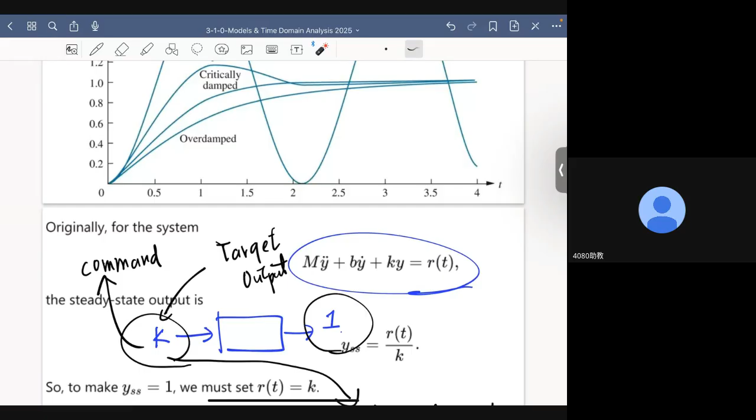Okay, I hope all of you did well for the first midterm, but it turns out that some people did not do that well. Please don't be frustrated, okay? There are second midterms and the final exams, okay?

So my intention for this lecture is that I don't want to flunk any of you, okay? That's my intention. As a matter of fact, if possible, I want half of my students in this class to have a grade of A minus or better. That is my goal. So please work hard, okay?

If you have any problem regarding my teaching material, teaching style, or whatsoever, come to see me or come to see the TA, who is a very competent young man, okay? And I'm sure he can be very, very helpful, all right?

Now, if you didn't do well for the first exam, it is quite okay, all right? Because you are probably not familiar with the style or the pattern of the exams, okay? Now, right now, you already have, I think, a very good idea of what our exams will be, okay? So hopefully you can do better. You can prepare yourself better for the coming exams.

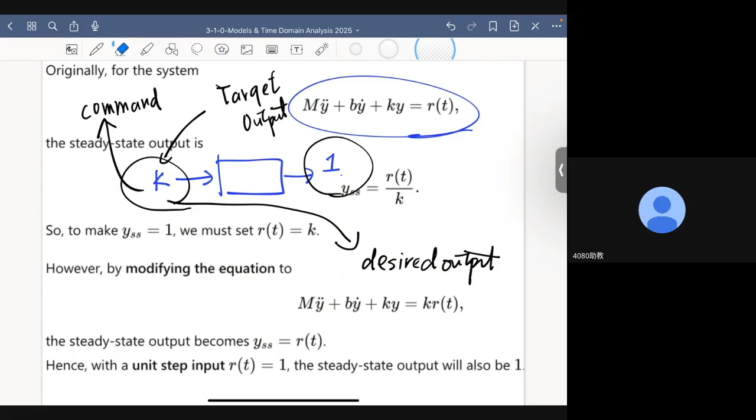And the same thing is happening in mainland China. They will build robots like they build electric cars, electric vehicles, okay? And robot building is a mechanical engineering process. It involves kinematics, it involves dynamics. It requires knowledge of mechanism. It requires knowledge of mechanical engineering design and manufacturing.

With all due respect, people from computer science and EE do not know anything about kinematics and dynamics, okay? Because they never take any course in that area. They have no knowledge about gear trains, bearings, linkage, all right? They don't know how they work, okay? But as mechanical engineers, we have been trained to be familiar with robots, okay? So the golden age of mechanical engineering is coming.

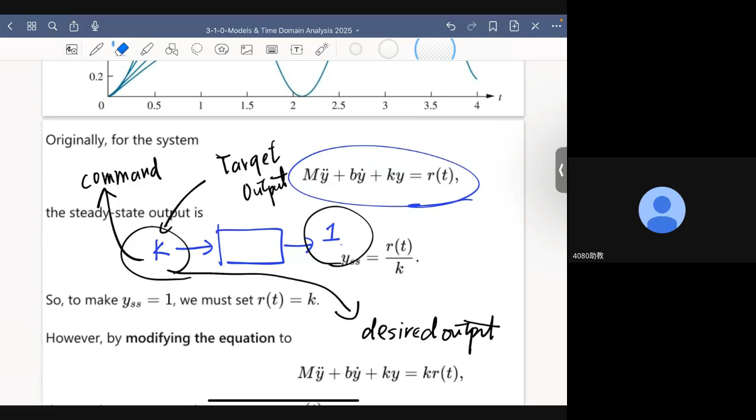And when it comes to robotics, control, of course, plays a very, very central role in building a good robot, okay? All right. Hopefully I have provided some positive messages to motivate you to spend more time on learning control and making yourself a better student of mechanical engineering, because it really has a good future.

Let me put it this way: I really envy you, because when I was young, mechanical engineering wasn't hot, okay? As you can see, for the past 2 decades, it is computer science and EE that dominate the industry, okay? And mechanical engineering probably only played a secondary role in those groundbreaking development processes. But I think things are changing, okay? Things are changing. I'm too old to see those changes become reality, but you will definitely see that, okay?

All right, let's go back to our revised spring mass damper system, whose transfer function looks like this. This is the input, this is the output, this is the transfer function. Zeta represents the damping ratio, and omega n is the natural frequency. From this transfer function, you only see 2 parameters, zeta and omega n, nothing else. Damping ratio and natural frequency, as we've said again and again, are the 2 key parameters for spring mass damper system, or for linear time invariant second order system.

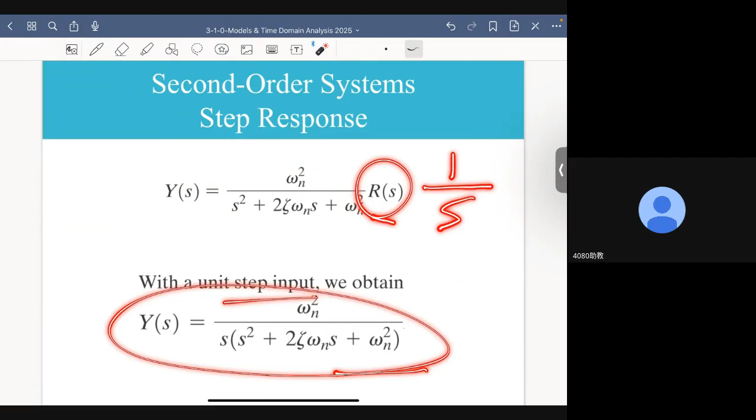Now what we want to do is study the step response. Since we have a step input, the Laplace transform of a step function is 1/s. So this is the step response in the s domain. We want to see what happens in the time domain, because we want to visualize the step patterns with our own eyes to see how the output of the system changes with time. That is something we can comprehend easily.

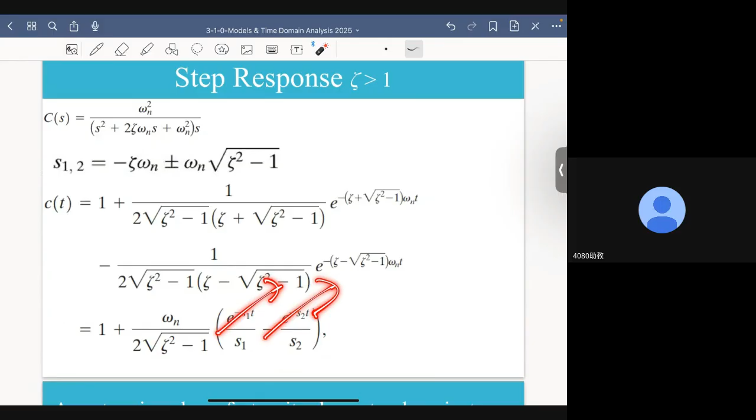So the first thing we do is assume zeta is larger than 1, which corresponds to the overdamped case. By taking the inverse Laplace transform, this is what we get for the unit step response. For this part, you see that we have a constant output here. And when time goes to infinity, as long as S1 and S2, given here, have negative real parts, these two will go to 0 as t goes to infinity. So the steady state output in this case is of course 1.

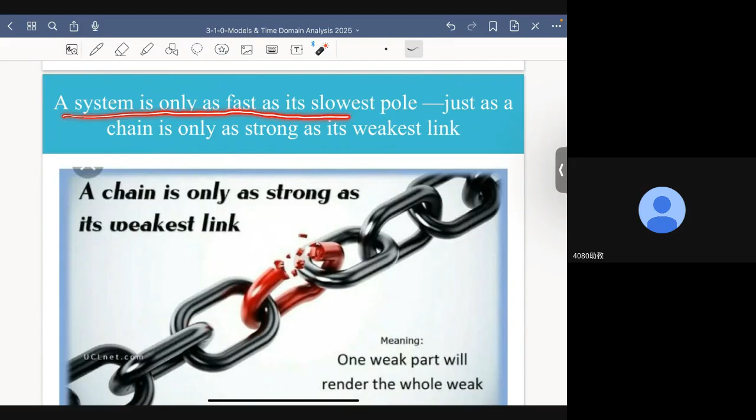Now, how do we characterize the speed of response of this system? Since we have 2 modes, a system is only as fast as its slowest pole. You have 2 distinct real poles: one is located here, the other is located here. Let's say S1 is -1, and let's say S2 is -9.

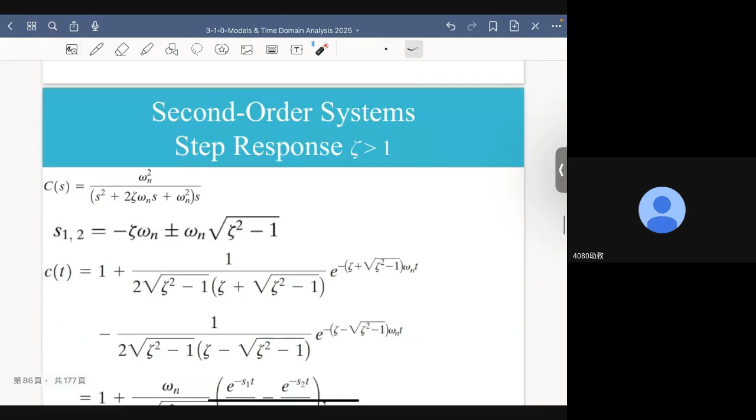So what you have is e to the minus t, and this is e to the minus 9t. This term will vanish, will decrease to 0, much faster than this one. So when it comes to speed of response, this mode is faster than that one. Put it another way, this pole is slower than this pole.

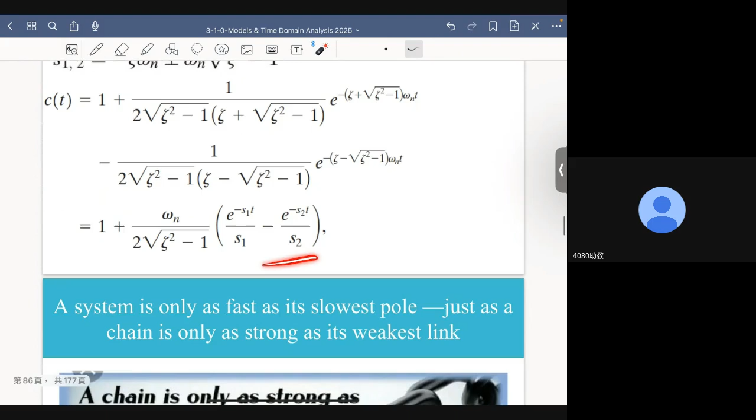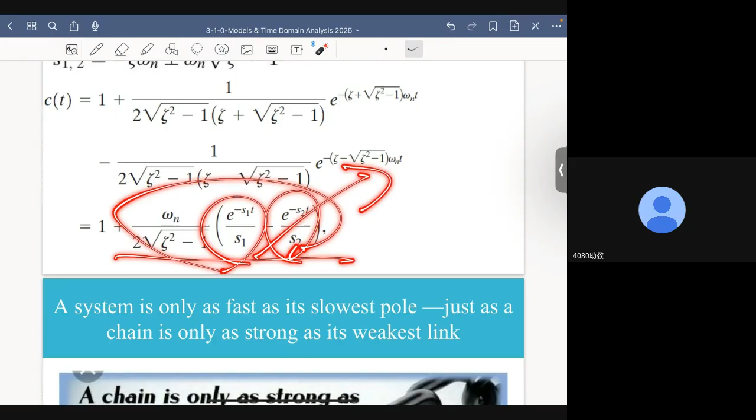A system is only as fast as its slowest pole. Because how do you characterize the speed of response of a system? It determines how fast this term vanishes completely. So if one of them disappears and the other term remains, the term collectively is still here, still not completely gone. This is the reason why we say a system is only as fast as its slowest pole, just as a chain is only as strong as its weakest link.

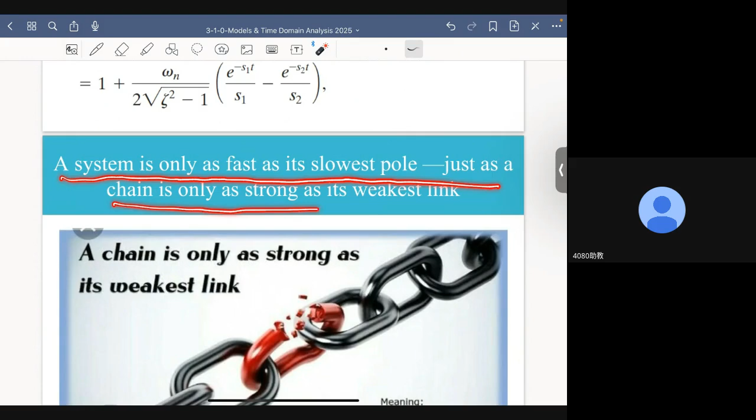It's an analogy. Now let's switch to the second case, which is the underdamped case. In this case, the value of zeta is between 0 and 1. Here, the poles are a pair of complex conjugate numbers. And remember, omega d represents the damped natural frequency.

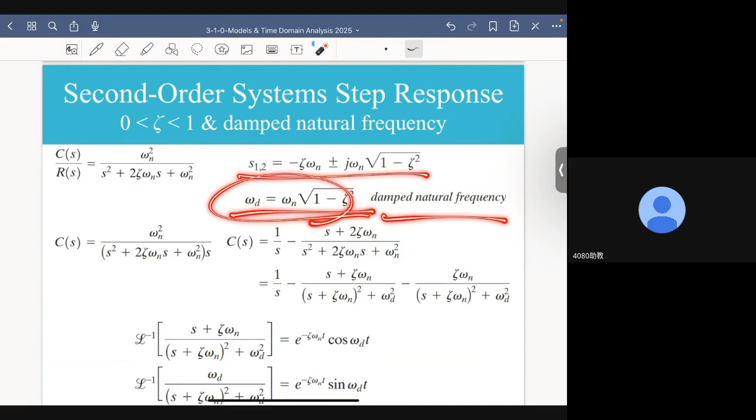Again, by taking the inverse Laplace transform and using partial fraction expansion, this is what we get. Using these 2 inverse Laplace transform formulas, this is the unit step response for an underdamped system. Again, it consists of 2 parts: the first part is 1, the second part is the transient term. The reason it is transient is because as long as zeta omega n is positive, when t goes to infinity, this term will go to 0. So this term eventually goes away. This represents the steady state output of the system, and this represents the transient portion of the unit step response.

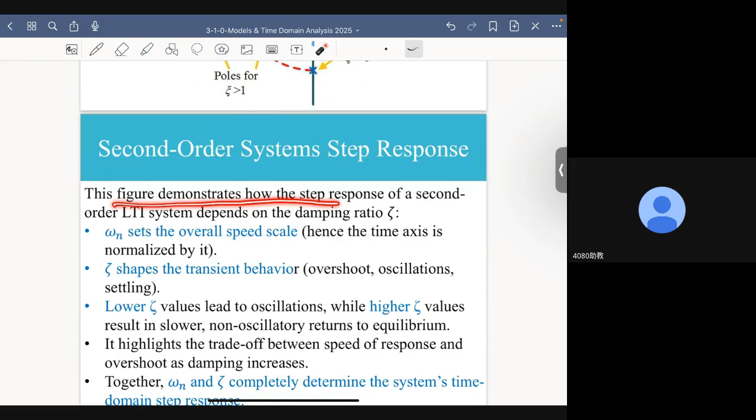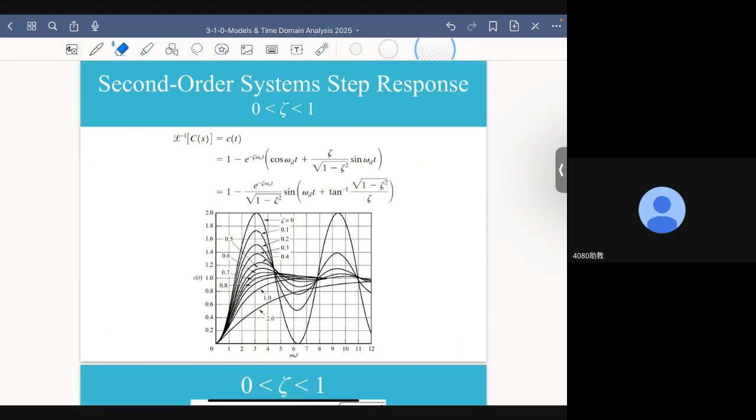Let's move one step back. You can say, wait a minute, you just told me there are two key parameters for the second order system, one is damping ratio, the other is natural frequency. This family of curves correspond to systems with different damping ratios. Well, is the natural frequency...

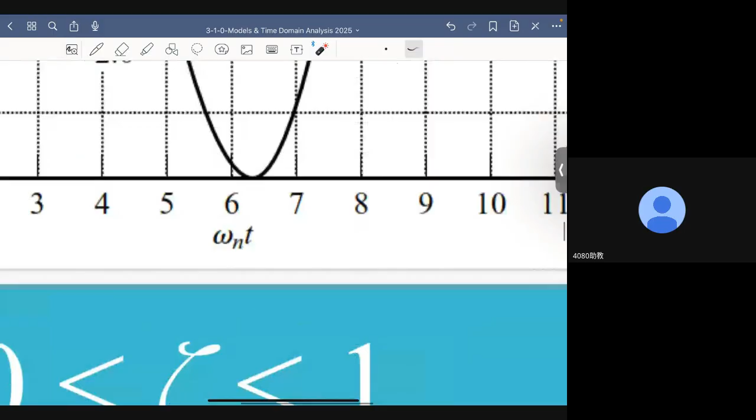What is the role of natural frequency? The role of natural frequency appears on the horizontal axis. Please pay special attention: these curves do not vary directly with time. They vary with a normalized time, which is the product of time and the natural frequency of the system. So this is a normalized time.

By introducing this normalized time, we can compare systems of different damping ratios on the same universal basis. We will go back on this normalized time and discuss it later.

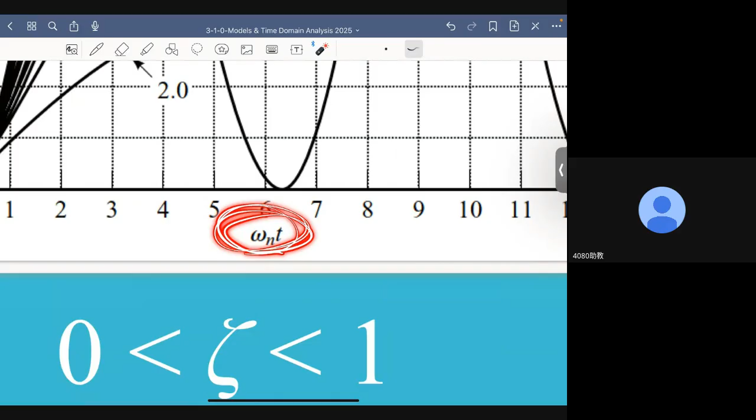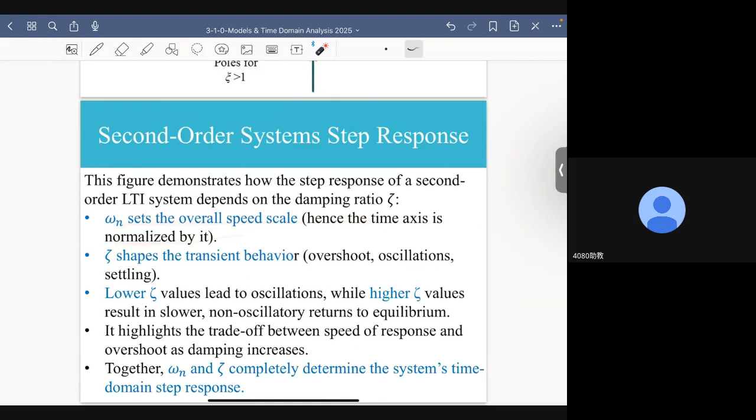That I can assure. Now let's relate natural frequency and damping ratio to the unit step response of the second order system. Omega n sets the overall speed scale, because the time variable here is omega n times t. Now please just accept this statement for the time being.

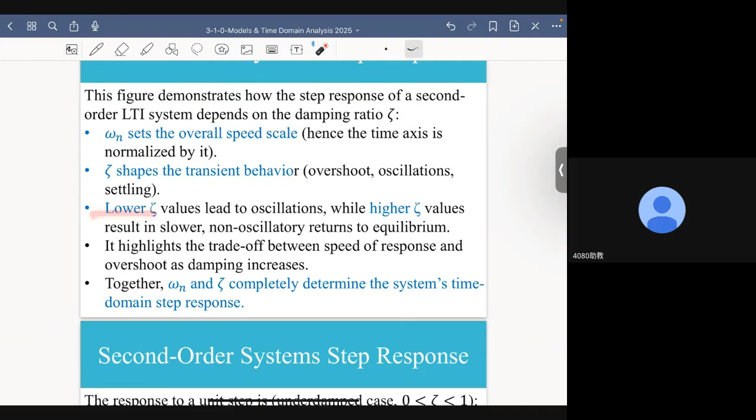I will go deeper about this statement in the later part of this course. Zeta shapes the transient behavior, including... different zeta, different transient behavior, including overshoot, the amount of overshoot, the pattern of the oscillation, and how long it takes for the system to settle. And lower zeta value leads to oscillation.

So the smaller the zeta, the stronger the oscillation, while higher zeta values result in slow, non-oscillatory returns to equilibrium. It highlights the trade-off between speed of response and overshoot as damping increases. When damping increases, the speed of response decreases and the overshoot also decreases.

We want smaller overshoot, but slower speed of response is not something we prefer, because when we do things, we want to get it done as quickly as possible, right?

When you order something online, what do you expect? Do you expect them to send you the product one week from now? Of course not. You expect them to deliver in 24 hours, in 12 hours, even better in 3 hours, or even better in 1 hour. And that could happen in the future.

So this is the reason why I tell my students again and again, there is so much to anticipate, so much to look forward to in the later part of your life. There are so many good things, so much great technology emerging, and your life will become much more productive, much more convenient, even breathtaking. So there is so much to improve as you age.

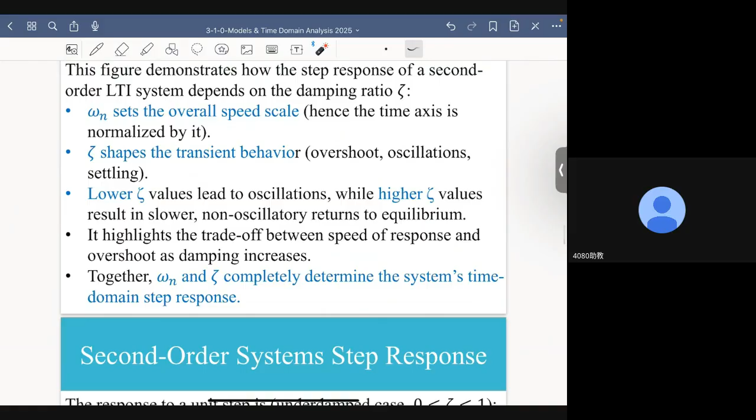Now together, omega n and zeta completely determine the system's time domain step response. Now let's look into the detail of the unit step response of the underdamped second order system.

Now we have this result. This is the unit step response for the underdamped case.

Now let me introduce a new time variable, which is dimensionless, and we denote it as tau, and we define it as the product of natural frequency and time. So tau is simply omega n times t.

Now once I introduce this term, I can rewrite this representation as this new equation. They are essentially the same. The only thing I do to go from here to here is whenever I see omega n t, I replace it by tau.

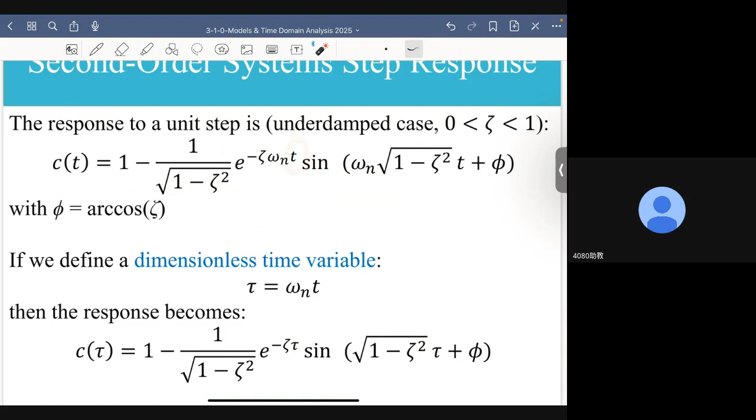So I have one omega n t here, and another omega n t here. In this expression, whenever you see t, there is always an omega n ahead of it. So once I've done that, t disappears entirely from this representation.

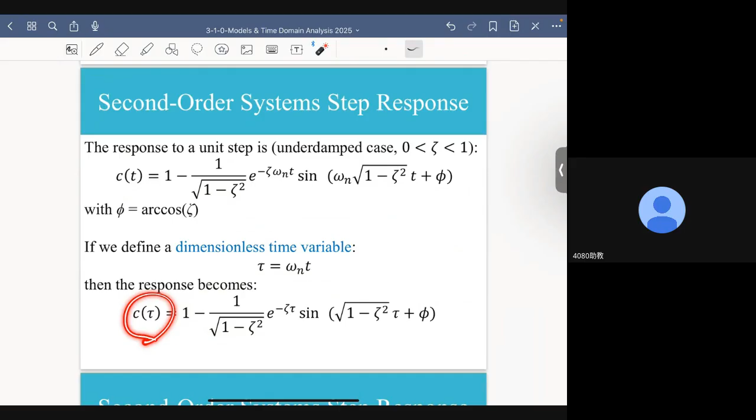And C, which is the output of the second order system, now becomes a function of tau. And then we can use different values of zeta to generate this family of curves with an independent variable of tau. That is the very reason why we call tau a normalized time.

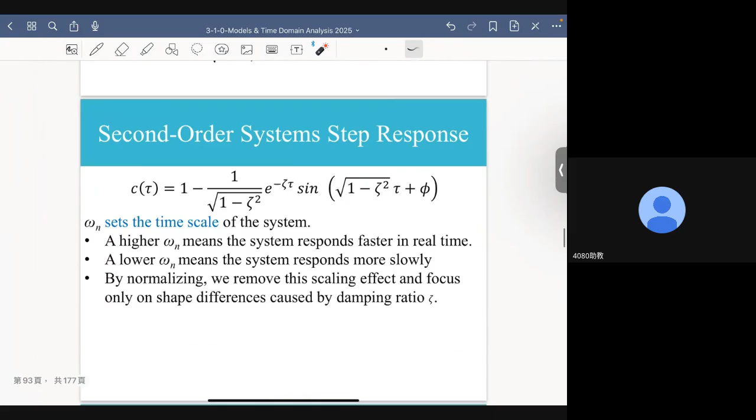Remember that we said omega n sets the time scale of the system. What do I mean by that? Omega n t, which is defined as tau, is what we said is a normalized time variable.

Why do we want to do that? Why do we want to introduce tau? By normalizing time, the response curves of different systems with different or varying natural frequency or damping ratios can be compared on a universal basis, on the same basis.

This is useful because systems with different natural frequencies will respond at different speeds. But normalizing allows us to focus on the shape of the response and the effect of the damping ratio zeta, rather than the absolute time. These statements are absolutely correct, but somewhat extra.

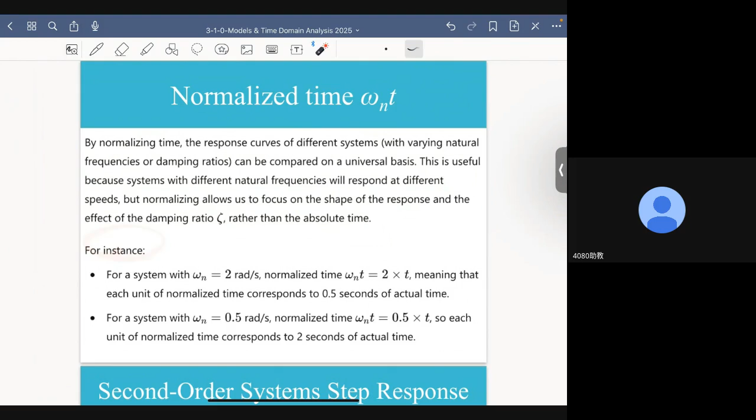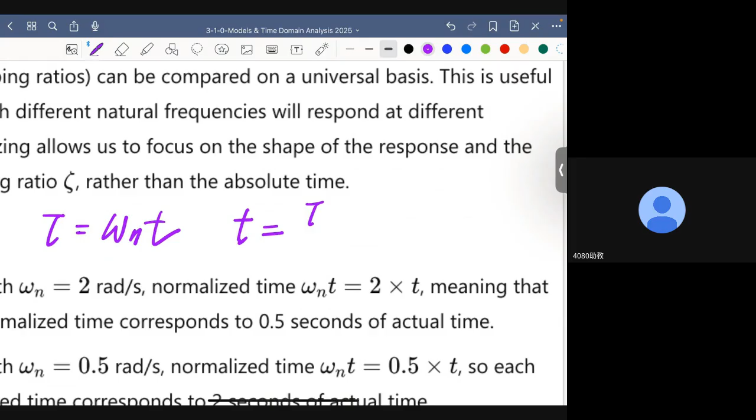Let's look at two simple examples. Remember that tau is omega n times t, so t is essentially tau over omega n. From this representation, let's assume tau stays the same, a constant. But if omega n increases, t decreases. They have an inverse relationship, as you can see from this equality.

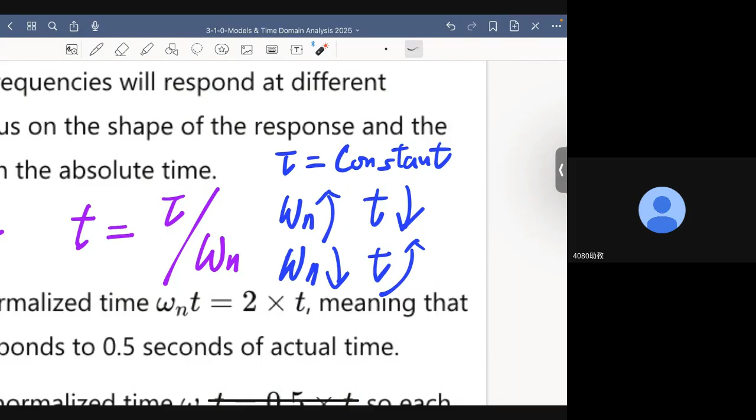In contrast, when omega n decreases, t increases. What do I mean by that? When omega n increases, which means I have larger natural frequency, t decreases, which means to reach the same destination, the time required is smaller, meaning you can get the job done in less time, meaning you have a faster system.

For a system with omega n equal to 2, normalized time omega n t means 2 times t. So each unit normalized time corresponds to, in this case, t equal to 0.5.

Now let's assume omega n is no longer 2, but 0.5. In this case, if omega n t is equal to 1, then t becomes 2. Remember that omega n t in both cases is 1, tau is 1 in both cases. But with different natural frequency, their speed of response can be revealed by the value of the real time, t.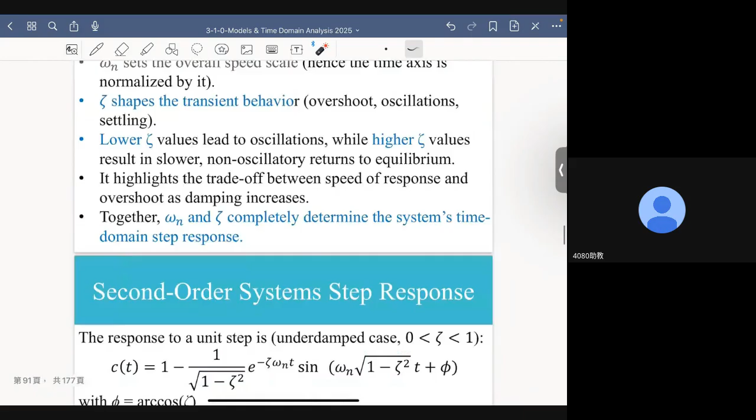So this is the very reason why these slides tell us that omega n sets the overall speed scale, meaning when omega n is larger, the speed is faster. End of story, period. A larger omega n always represents a fast response.

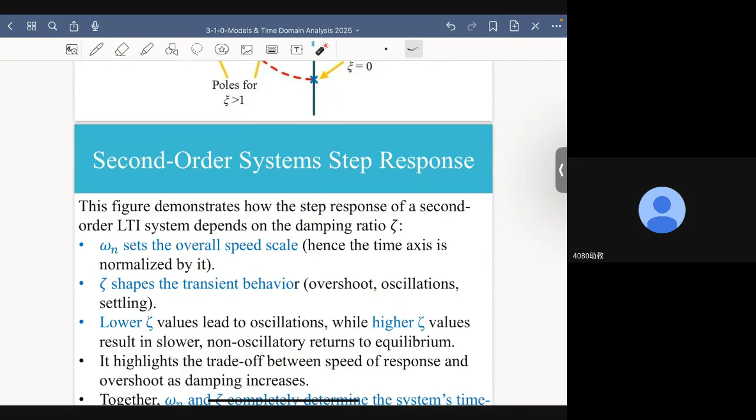Why is that the case? Remember that omega n is defined as this. How do you make a spring mass damper system move faster? First, you have large K, a very, very strong spring constant.

So once you put the mass, it will produce a very large force to counteract the applied force, and as a result the mass will move very fast. And how to make the mass move even faster? Easy—for the same amount of force, how do you generate larger acceleration? By reducing mass. So small mass, high spring constant is the formula for higher natural frequency.

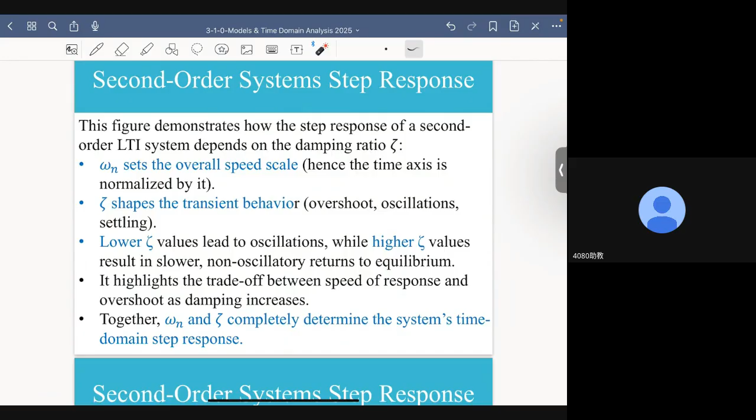And higher natural frequency, when you go back to the roots, to the very nature of the spring constant and mass, you understand why natural frequency relates directly to the speed of response of the system. Simple physics, direct relationship, very straightforward. Nothing fancy, nothing complex.

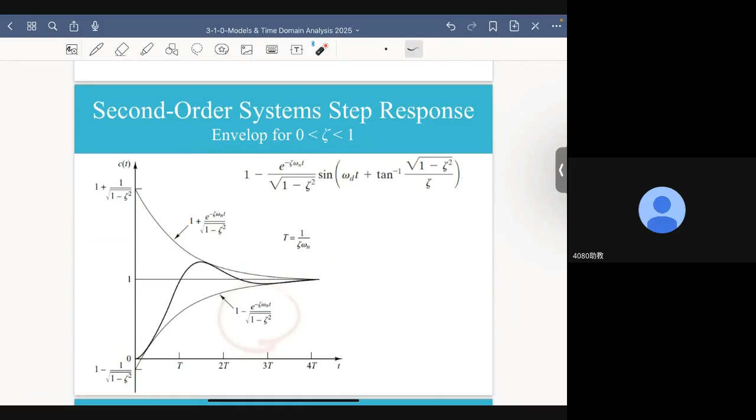This is another plot for the step response of a spring mass damper system. This apparently is an underdamped case, and we have an envelope here, which of course comes from here. Now let's check out some real examples.

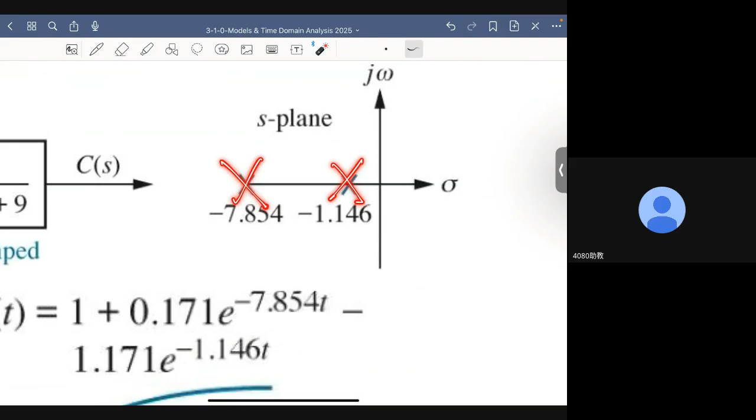Let's say we have a second order system. If you solve for the roots of this characteristic equation, you'll see two roots, which correspond to two poles of this second order system. One is located at -1.146, and the other is located here. This will be the unit step response of this system, and this curve is actually what the unit step response looks like. Nothing fancy, nothing unexpected—two real roots, overdamped system, no oscillation.

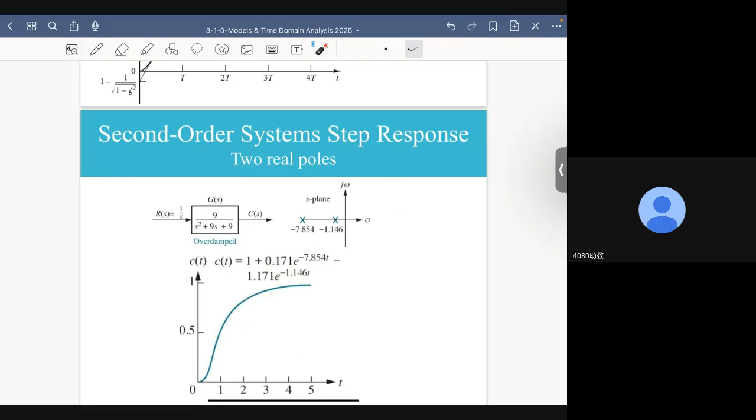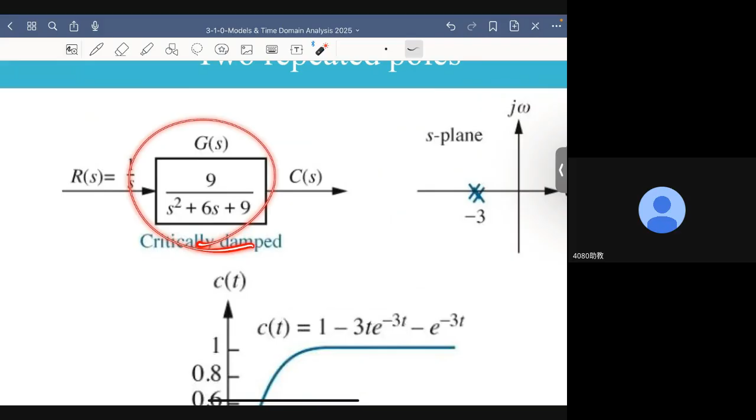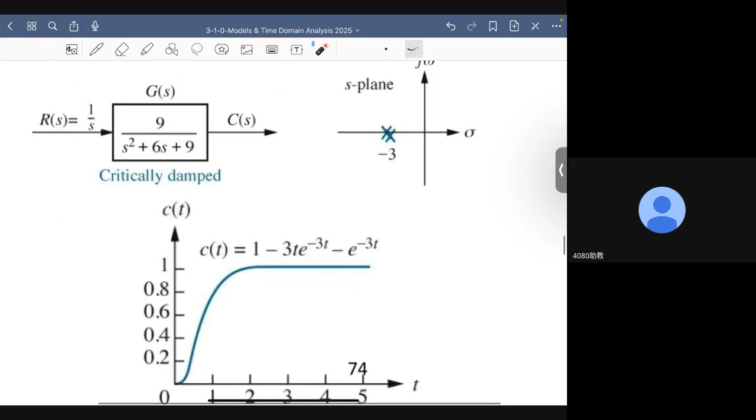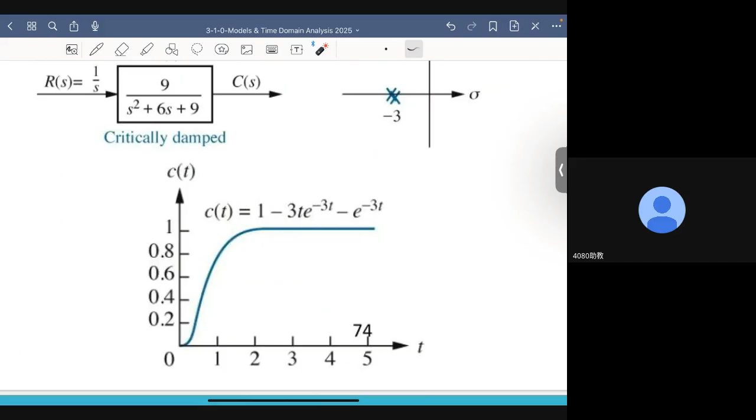Now let's look at another example. Here I have two repeated root poles from this transfer function, both located at -3. So the unit step response looks like this. The first pole generates this mode; the second pole, which has the same location as the first, produces this mode. When you put them together, this is the unit step response of the system. Again, no surprise, because this is a critically damped system with no oscillation—everything comes out as expected.

Now let's check it out—check out the two complex conjugate poles.

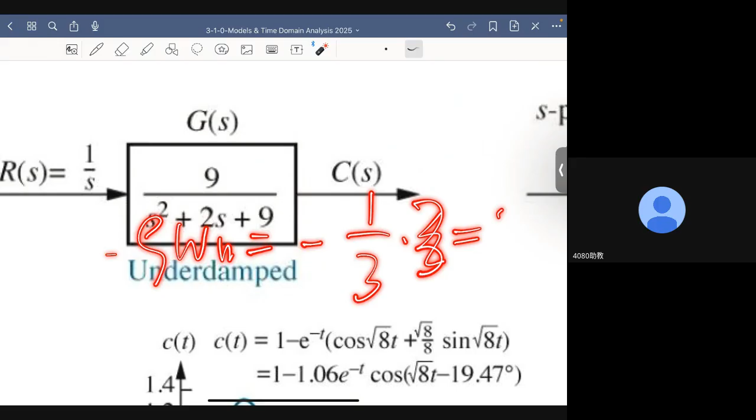And since omega n is 3, eta is 1/3, right? And minus eta omega n is 1. I'm sorry, minus eta omega n is minus 1 over 3 times 3, which is 1. This is the reason why we have e to minus t here, because the envelope should be this, right?

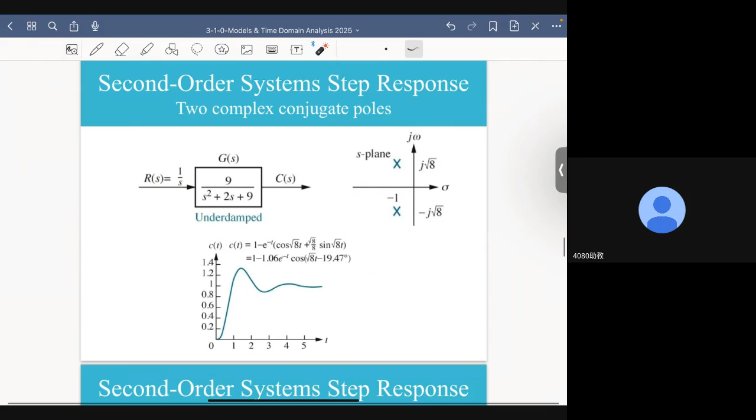Now, where does root 8 come from? Easy. This is the damped natural frequency, omega d, which is omega n times square root of 1 minus eta squared, all right? Anyway, the location of these two poles are plotted in this figure. This is the mathematical expression of its unit step response. And this is what it looked like when you plot it out. No big deal, everything comes out as expected, underdamped oscillations, okay.

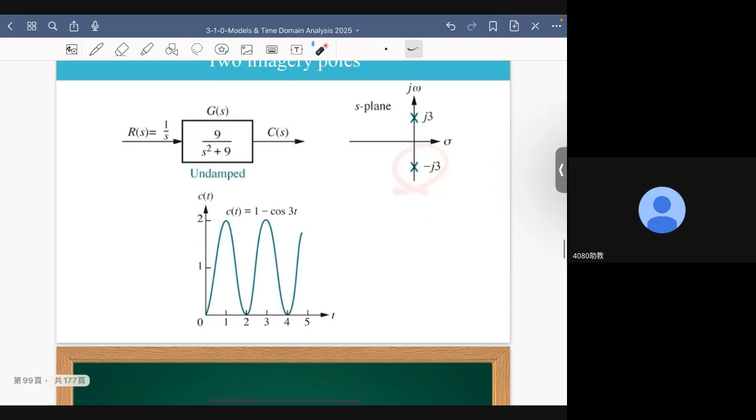Now let's go one step further. Let's see two imaginary poles, okay? Because this is our transfer function, so the poles are located at J3 and minus J3, okay? And this is its unit step response.

Because the poles are located on the imaginary axis, the system is marginally stable, which means its response will not diverge, and it will also not converge. It will just keep going, okay? The amplitude remains the same even when time goes to infinity, all right?

Now let's move to another important issue: measures from unit step response. Why do we want to study unit step response? Remember, we are engineers. When we study things, whenever we study things, we study them because they have some practical value, okay?

Now, the reason why we want to study step response is by examining the resulting step response, we can come out with many measures which can help us characterize the performance of the second order system—how fast the system is, how stable the system is, okay? We must have some measures to quantify them, okay?

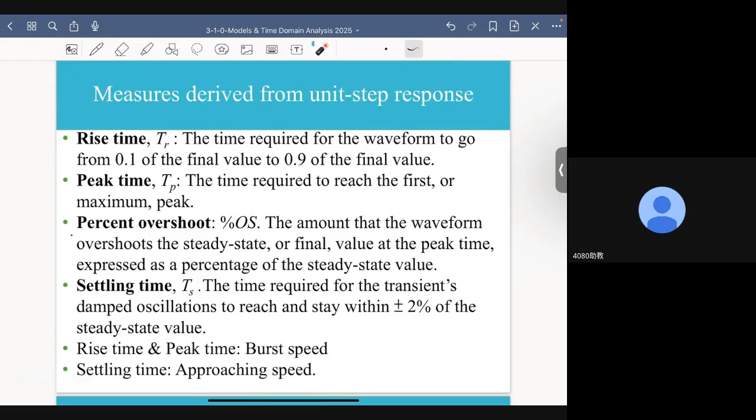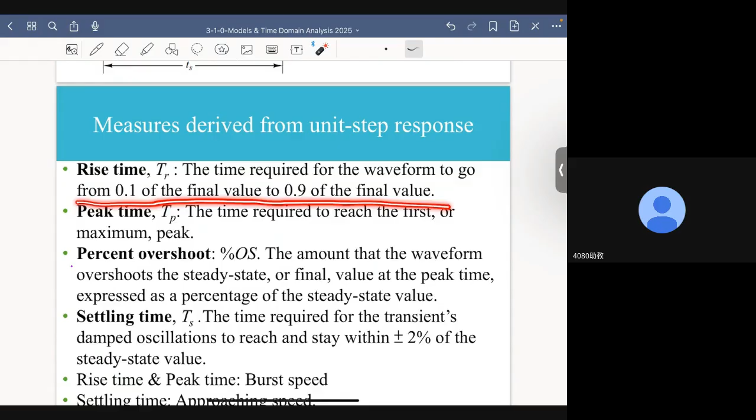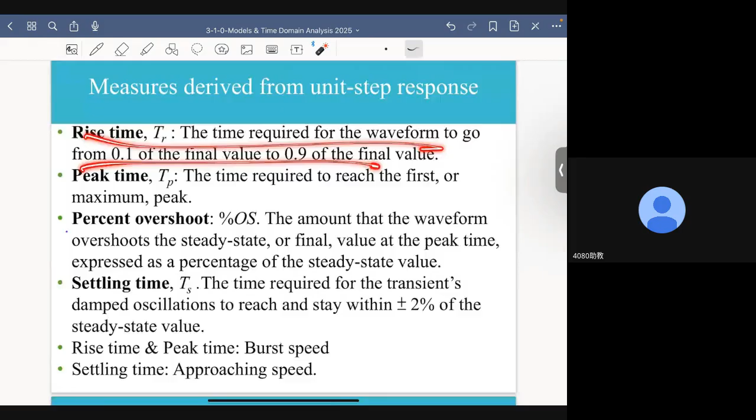Rise time is the time required for the waveform to go from, say, 0.1 of the final value to 0.9 of the final value, okay? There are actually different definitions of rise time. In this particular definition, this rise time corresponds to TR1 here in this figure, and it is the time required to go from 0.1 all the way up to 0.9, right?

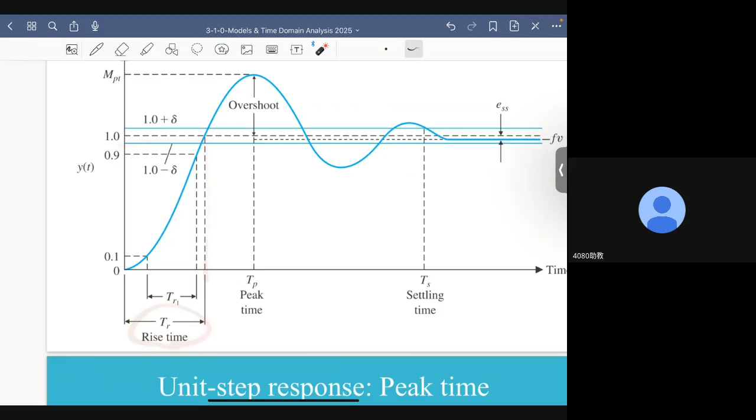This is one definition of rise time. Another definition is the time required to go from 0 to 1, right? It depends, okay? Different people use different definitions, but the basic concept remains the same, okay?

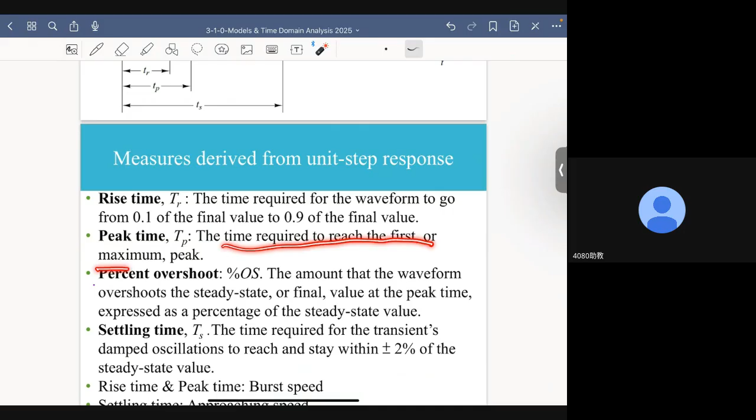Now, what is the peak time? The time required to reach the first or maximum peak, okay? This is the peak. The time required to reach the peak is what we call peak time. And here, corresponding to the peak time, we have the largest response.

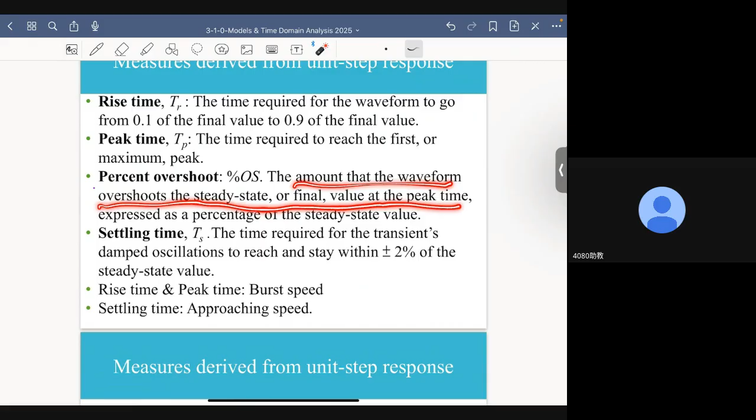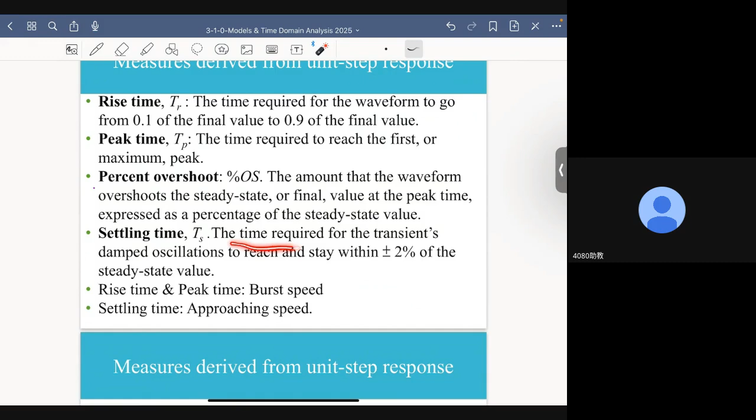And here we define the overshoot, or percent overshoot: the amount that the waveform overshoots the steady state or final value at the peak time, expressed as a percentage of the steady state value, okay? That's the typical fashion for extracting overshoot. Finally, settling time: the time required for the transient damped oscillation to reach and stay within plus or minus 2% of the steady state value, all right?

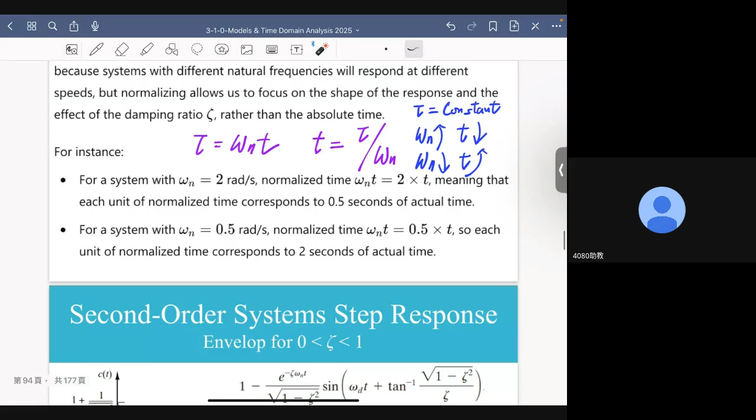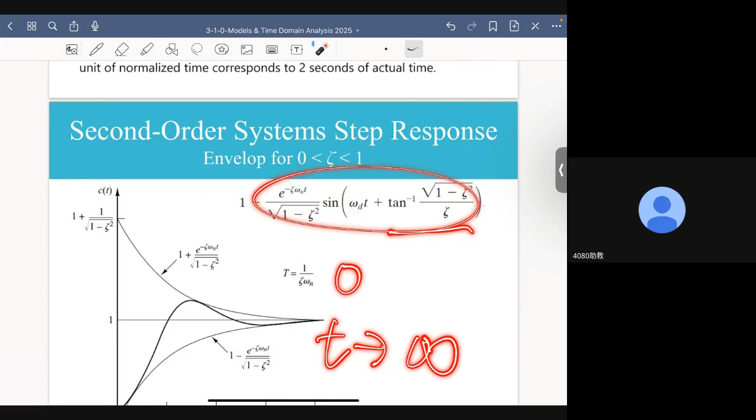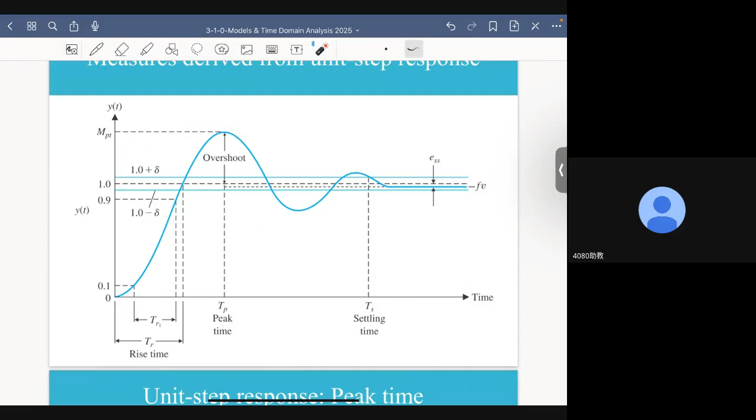Eventually, the system will reach steady state, but theoretically, that will take forever. The distance will only become 0 when t becomes infinity, but that is a mathematical idealization. For practical purposes, I don't care if it really goes to 0. What I want is it's small enough, because in engineering applications, there is always tolerance. We always have room of tolerance. So let's say the room of tolerance here is plus minus 2%.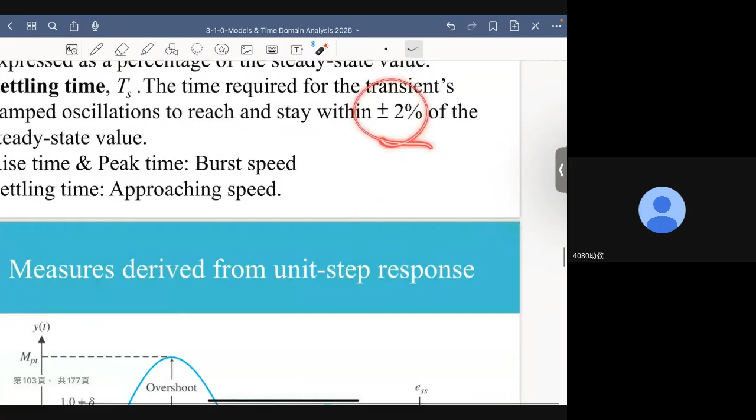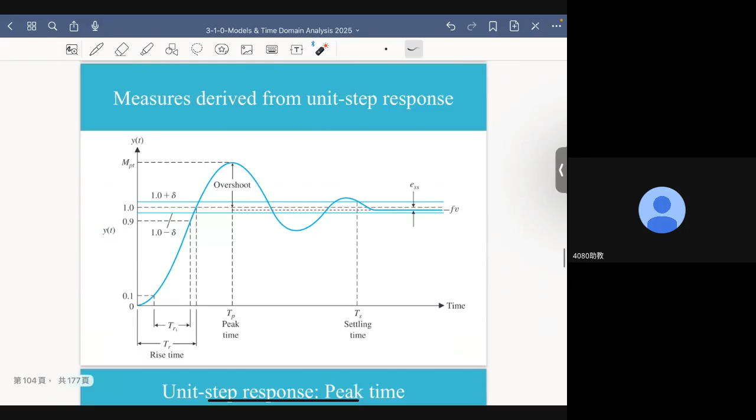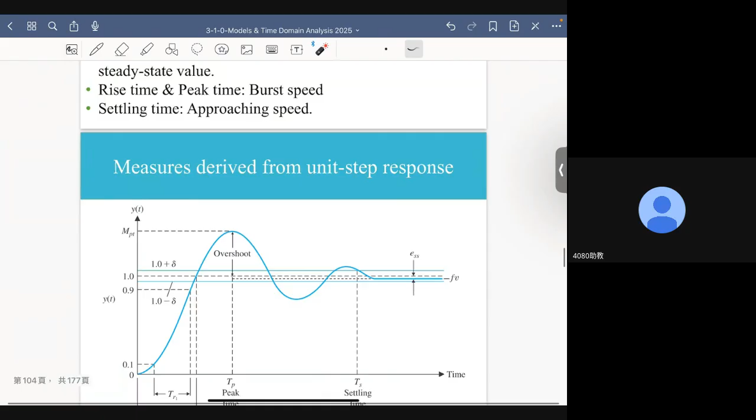You can examine the response. The settling time is defined as the time required for the transient damped oscillation to reach and stay within this band of tolerance. It has to go inside this band, and it has to stay there afterwards. Once you identify the time points which satisfy the above two requirements, you have the settling time. So these are four important measures for us to use to characterize the performance of a linear time invariant second order system.

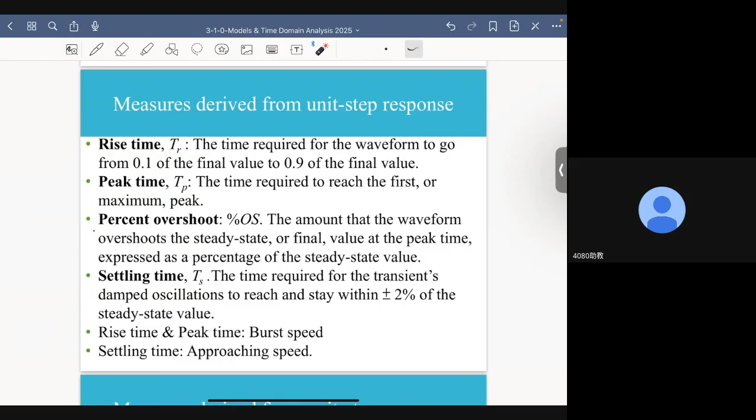Now, the next thing we want to do is relate them to damping ratio and natural frequency. Why do we want to do that? Because first, we know omega n and zeta are two key parameters of the second order systems. The second reason is once I know the relationship between those measures and natural frequency and damping ratio, if the measure itself is not satisfactory and I need to adjust it, I need to make them better.

Let's say the peak time is not small enough, and I need to recalibrate my system, then I will have a very good idea how to do that. Should I increase the natural frequency or should I decrease the damping ratio? I need to know the relationship between TP and damping ratio and natural frequency in order for me to do that. So let's first determine TP, which is the peak time.

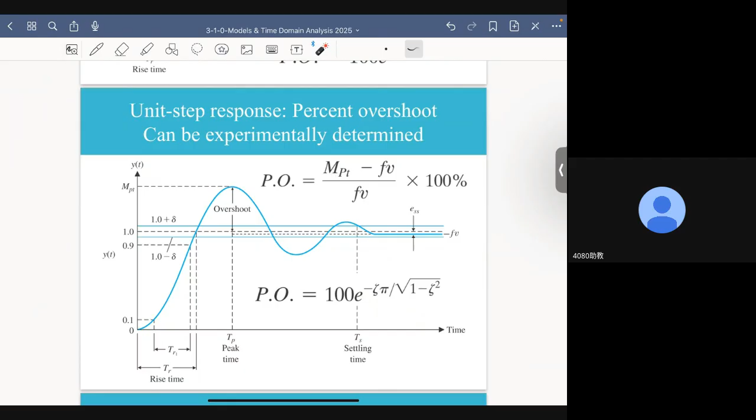By substituting this TP into this expression, you can determine MPT, and this is actually the amount of overshoot. Times it by 100, we get percent overshoot. Now, one very important thing is that the percentage of overshoot is only related to damping ratio, it has nothing to do with natural frequency. So if you encounter a system which turned out to be satisfactory, but with one important weakness, that is excessive overshoot - the overshoot is simply too large - then what you need to do is tune zeta, tune the damping ratio. Don't do anything to the natural frequency because it won't help, since overshoot has nothing to do with natural frequency. It is controlled directly by damping ratio.

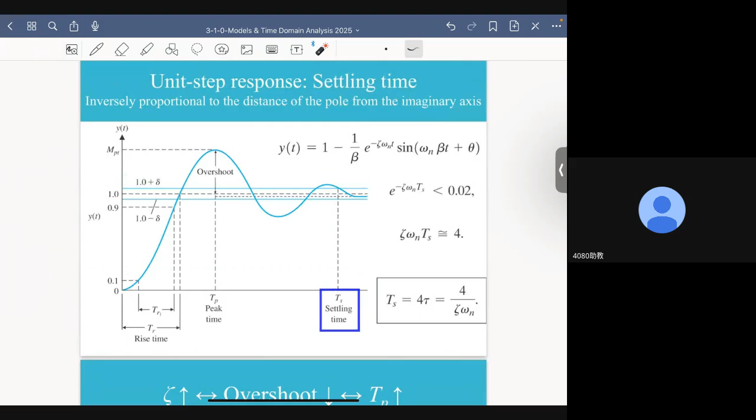The next thing we want to do - we have identified peak time, right? The next thing is we want to determine settling time. Now remember, again, this is the unit step response for the underdamped case.